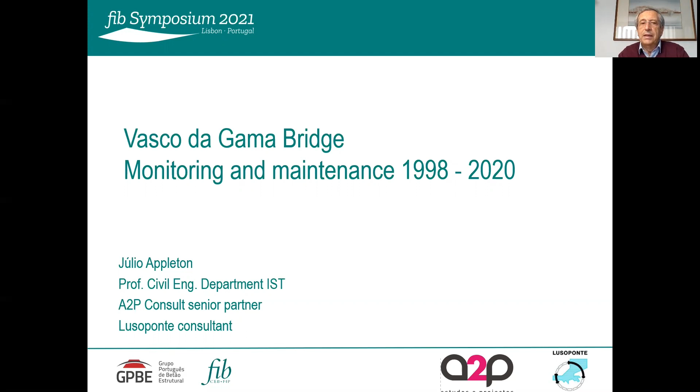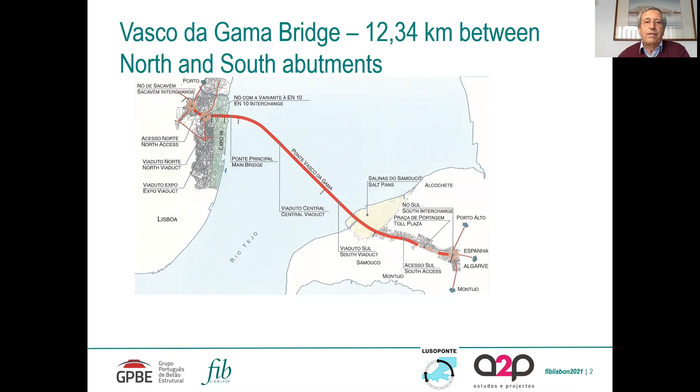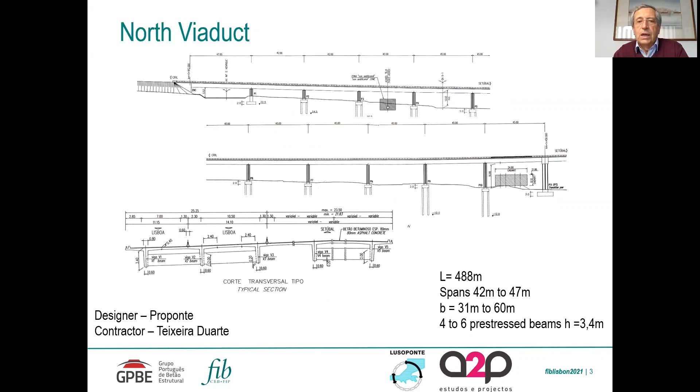Between the abutments, Vasco da Gama Bridge has 12 kilometers and 340 meters, with 5 types of different structures, starting on the right bank with the North Viaduct, 488 meters long, with typical spans of 45 meters. The deck was constructed with traditional scaffolding supported on the ground.

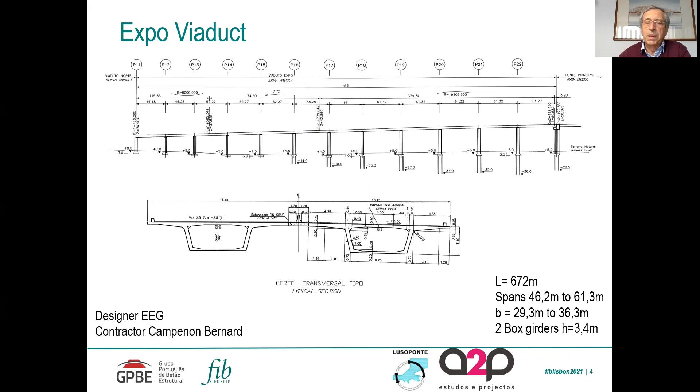Then the Expo Viaduct was constructed, the deck with a cantilever system of construction with precast segments. It has a total length of 672 meters and typical spans of 61 meters.

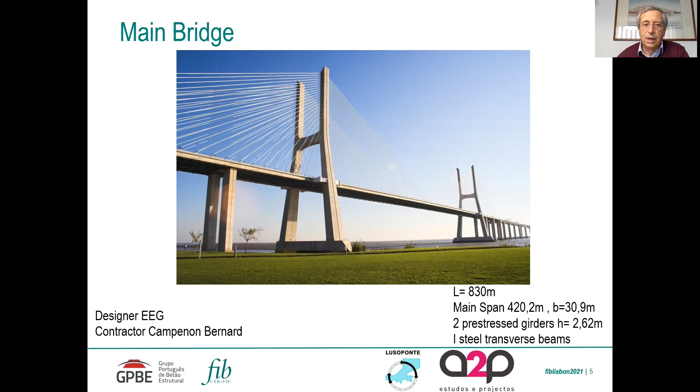Then the main bridge with a total length of 830 meters and the central span with 420 meters. The deck is a full suspension system, meaning there is no vertical support of the deck on the tower.

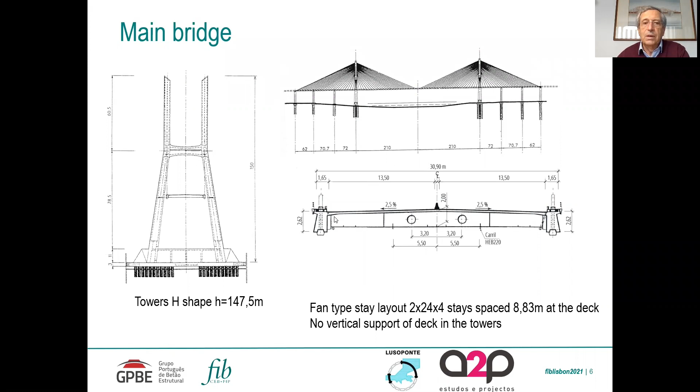The stays are fixed in 2 lateral pre-stressed concrete beams. The beams are connected by steel transverse beams.

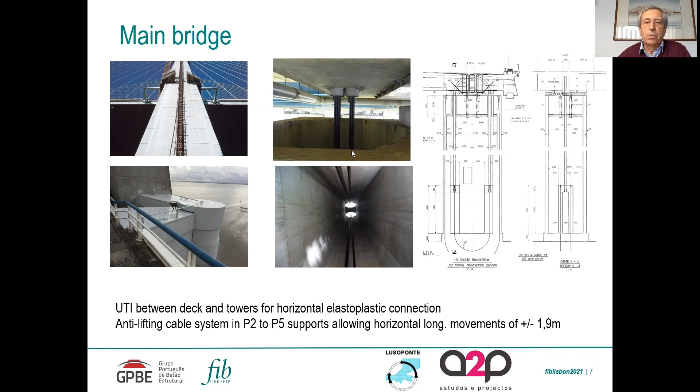That is done with these pre-stressing cables that connect the top of the deck to the bottom of the piers.

Then the central viaduct is the longest structure in the Vasco da Gama Bridge, with 6,530 meters, typical spans of 78 meters, and navigation spans of 130 meters. These navigation spans were also done with the cantilever type of construction with precast segments.

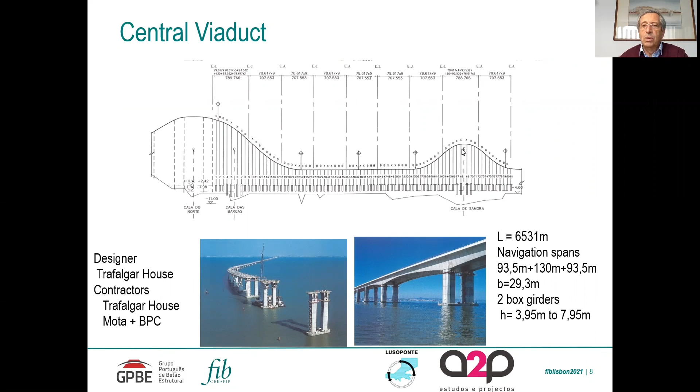The current spans have been done with full precasting and transportation of the total box girder by the Rambiz crane.

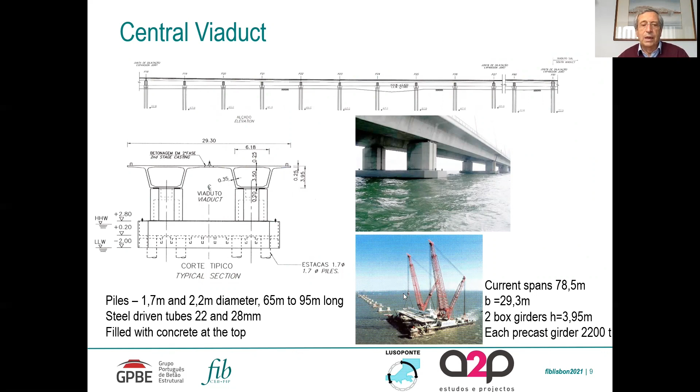Finally, the South Viaduct has 3,800 meters with typical spans of 45 meters. The deck was constructed by a launching girder.

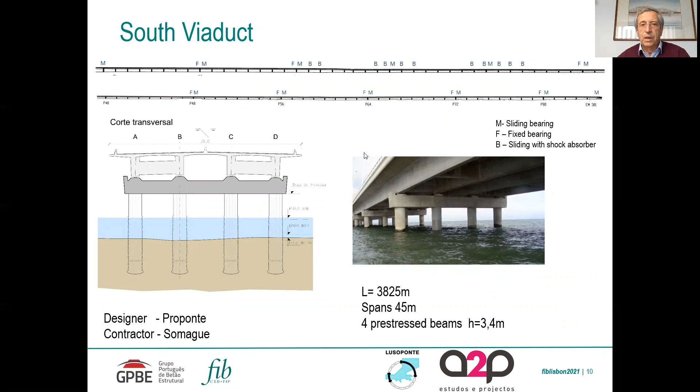This project was a design, construction and operation project. It had a very good initial specification, and I refer here to the service life that was specified at 120 years, and the corresponding cover that was used in the several structures.

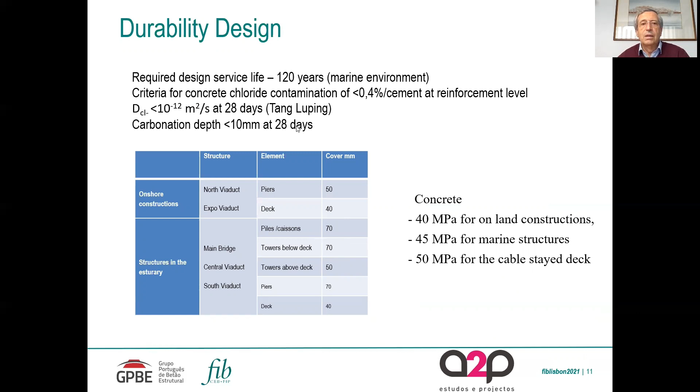For the marine structures, 7 centimeters. The concrete strengths - you have here the minimum values and the concrete quality specified.

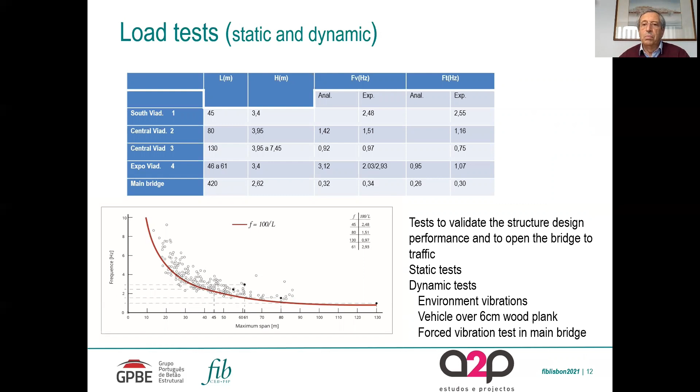Finishing the construction, static and dynamic load tests were performed. In this slide, you can see the vertical frequency of vibration of the various structures. The dynamic tests were done using environment vibration, or using a vehicle over a wood plank, and for the main bridge, a forced vibration test with a 60-ton mass fixed with pre-stressing cables that were then cut.

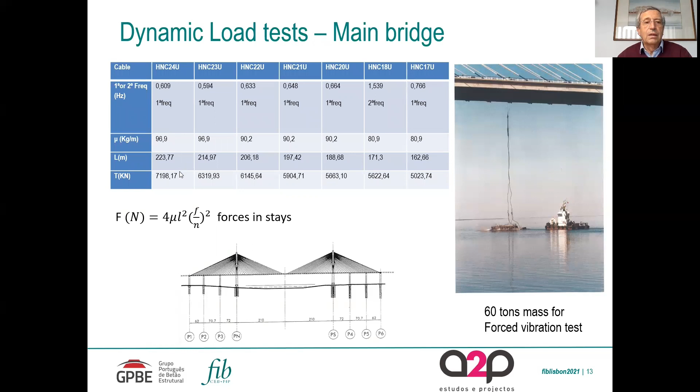You can also see in this slide the measurement of the frequencies in the stays, which enables evaluation of the forces in the stays and comparison with the design values.

Starting in March 98, we had the monitoring plan. In the structure, a lot of sensors were used to measure deformations, rotations, joint movement, temperatures, and also topographic monitoring.

The main objectives of this monitoring plan are to assess the behavior of the structure in service conditions, and if there is an extreme event, to have enough information to assess the eventual damage in the structure.

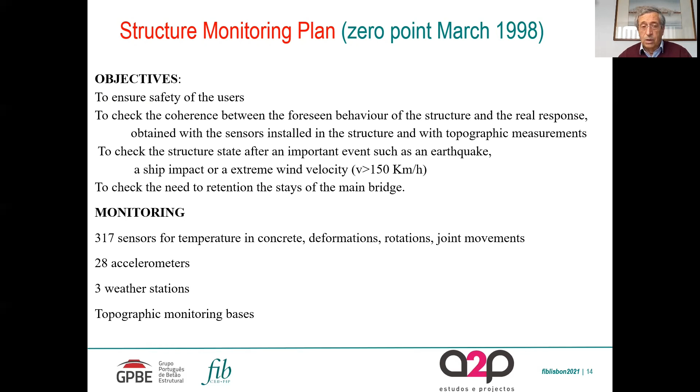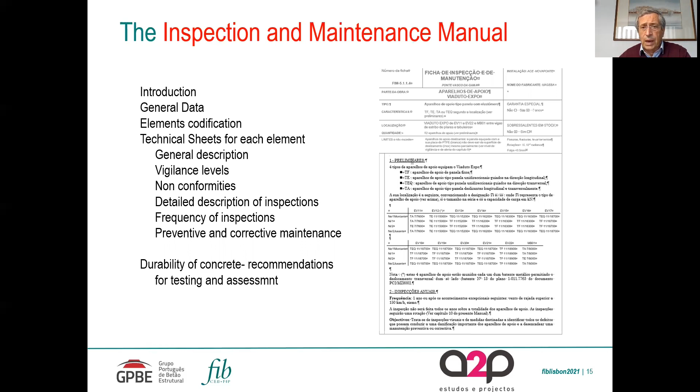A very important document for maintenance works and inspection is this manual, where for all the structures and all the elements, we have a description of the element, what should be inspected, with what regularity, and what can be the envisaged preventive and corrective maintenance. I show here these technical sheets for the bearings of the Expo Viaduct.

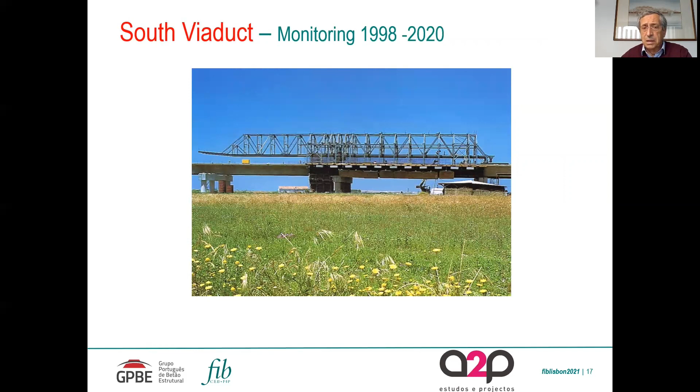Now I selected some monitoring and maintenance works in the 3 structures: the South Viaduct, the Central Viaduct, and the main bridge. You can see here the registration of the sensors inside the concrete to evaluate the temperature variations along the days and along the year.

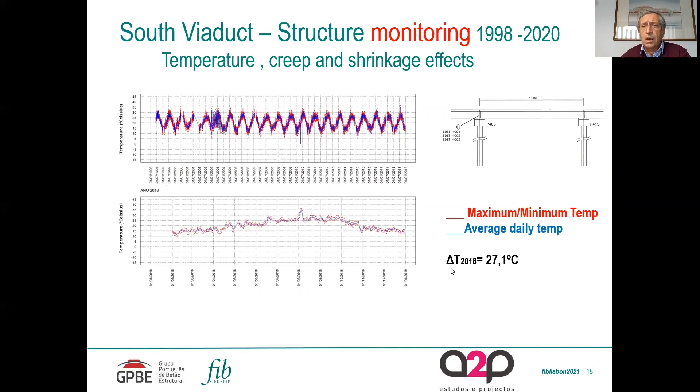Here you have, during 2018, the average daily temperature and the maximum and minimum temperature, an amplitude of 27 degrees maximum in 2018.

The expansion joints are also monitored. For this structure, the distance between the joints is 360 meters. The expansion joint movement is the sum of the variation of the two adjacent structures. In this case, one of the structures has fixed bearings, but the pier can move due to creep, shrinkage, and temperature. On the other side, the bearings are sliding bearings, so the deck can move.

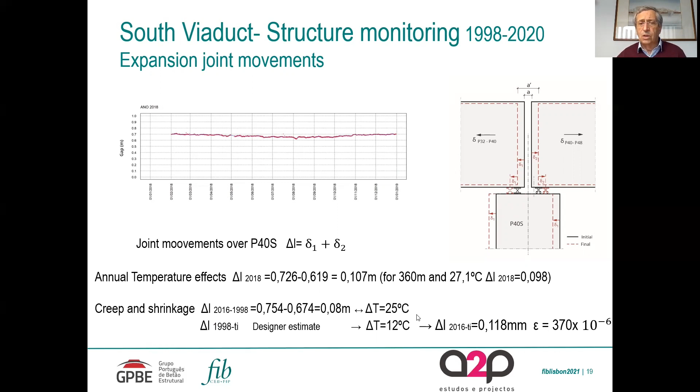We can see that in 2018, there was an amplitude of movement of the joint of 10 centimeters, and we can assess along the years what was the effect of creep and shrinkage. We arrived at 11.8 centimeters, which corresponds to an equivalent temperature variation of 37 degrees.

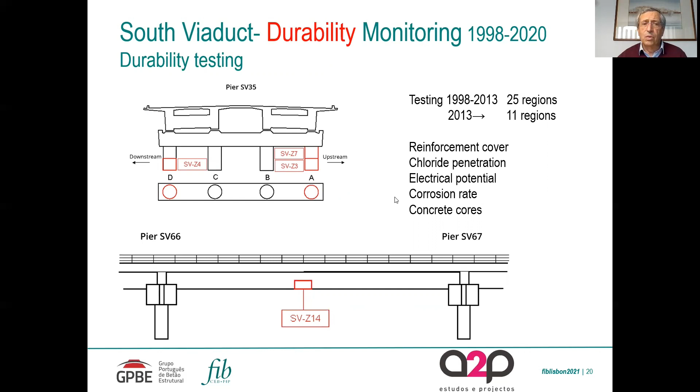To assess durability, we selected in the beginning 25 regions where we measure the cover, assess the chloride penetration, and perform other tests to assess the eventual corrosion of reinforcement, and we extract some cores as well. You see here a slide with the results of the geophysical radar.

All the piers and piles have had their cover determined. Unfortunately, in some cases, we realized that the reinforcement has moved horizontally, and in some areas the cover is not the 7 centimeters that was specified.

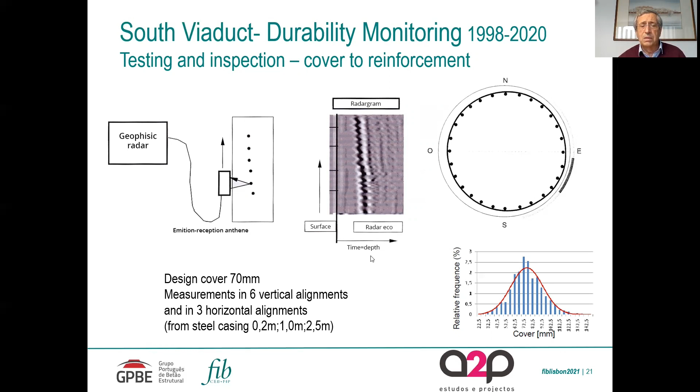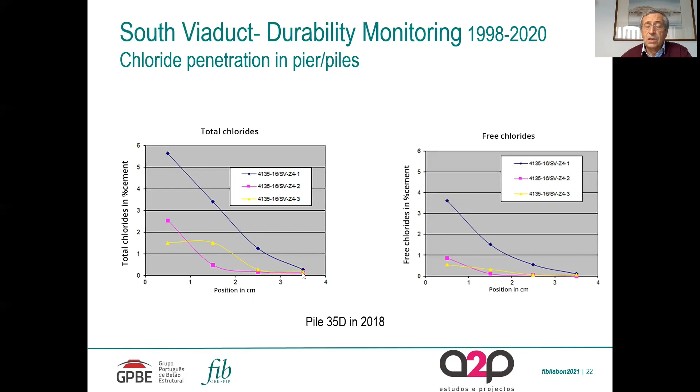So, in what concerns chlorides, when there are no concrete defects, the chlorides have reduced penetration. So after these 22 years, it arrived only to 3 centimeters deep.

With these results, the diffusion coefficient and its variation could be assessed, and a deterministic prediction of the chloride penetration was done by the laboratory LERM. The conclusion is that for the next 20 years, it is not expected to have depassivation of reinforcement due to chloride at 7 centimeters deep.

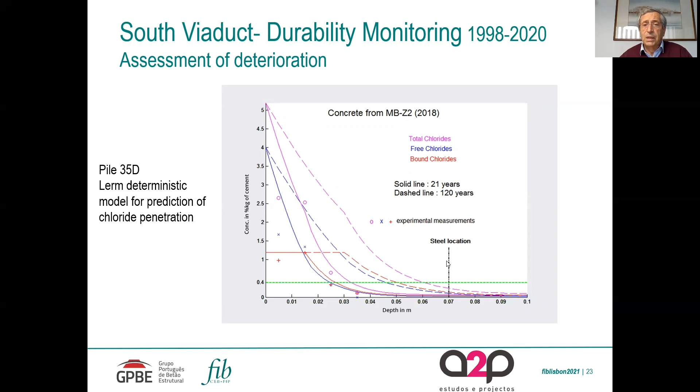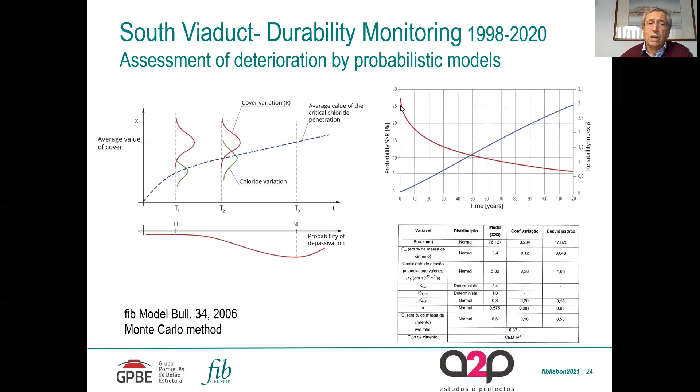But since the cover is not a deterministic and fixed value, as there is large variation, and also the chloride penetration is not a deterministic value, we have performed a probabilistic model using the FIB Bulletin 34 model, and we arrived at the conclusion that for the next 20 years we get a high probability of depassivation in the reinforcement.

This explains why, since 2004, several maintenance, repairing, and preventive maintenance works have been executed in the South Viaduct. The first activity was to introduce, in some alignments, the advanced pile encapsulation system. It consists of a casing, a glass fiber casing, and the injection of an epoxy grout.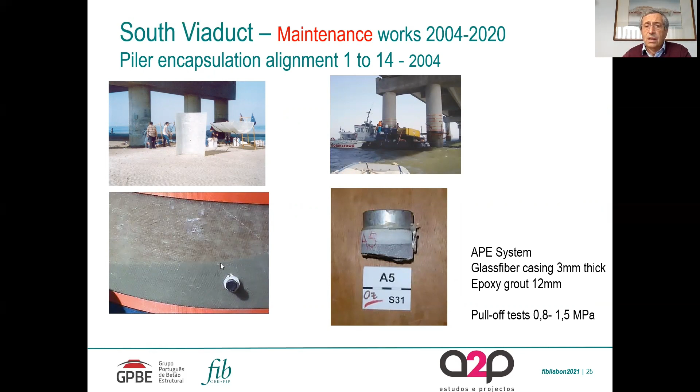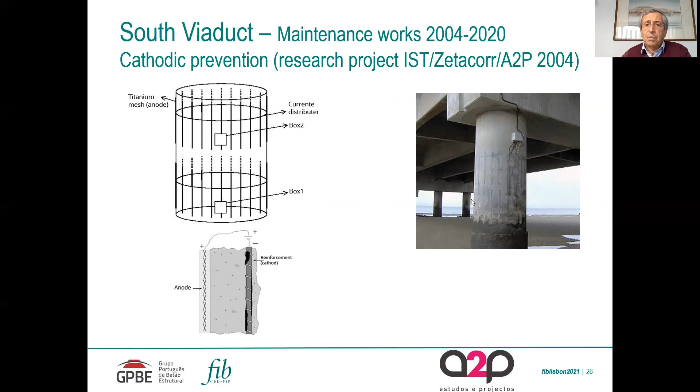And that year, we also had the opportunity to participate in a research project, and we introduced in one pier a preventive cathodic system with titanium anodes.

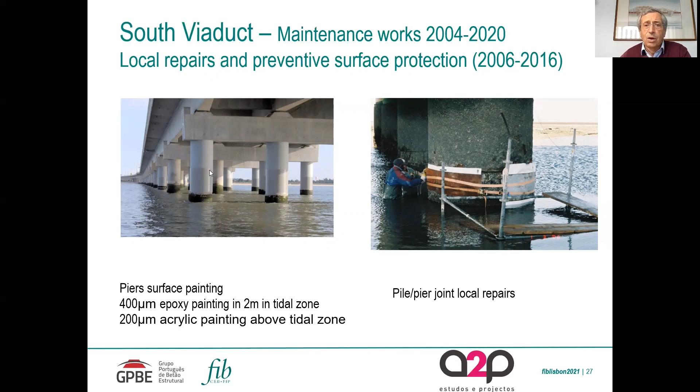Then, in the piers where the cover didn't reach 7 centimeters, we introduced a protective surface painting with epoxy in the tidal zone and acrylic painting on the top of the piers. We have also done some local repairing.

Later on, we verified in the inspections that in the piers and piles that had been executed with a temporary earthfill, at the top of the pile and the start of the pier, there were some concreting defects, as you can see here, that were not corrected during construction.

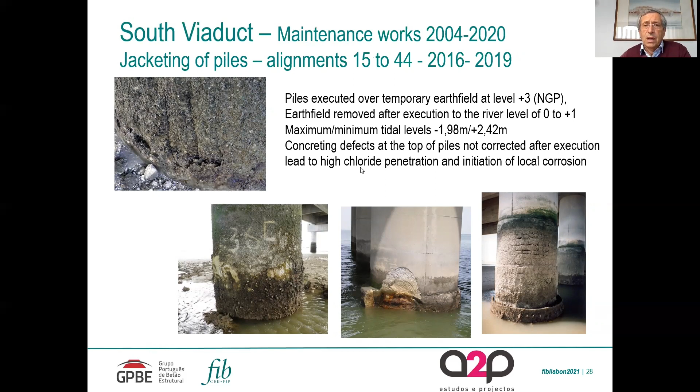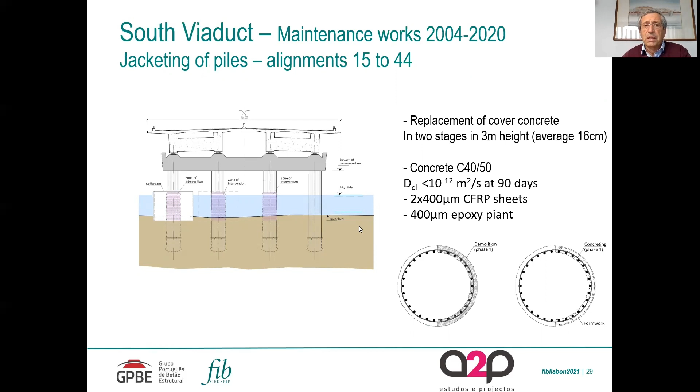And so in 2016, repairing was introduced, replacing the cover concrete and also doing a confinement with carbon fiber afterwards. You see here the schematic of the two phases of this activity.

To do this work properly and with the correct quality, we have to do it under dry conditions.

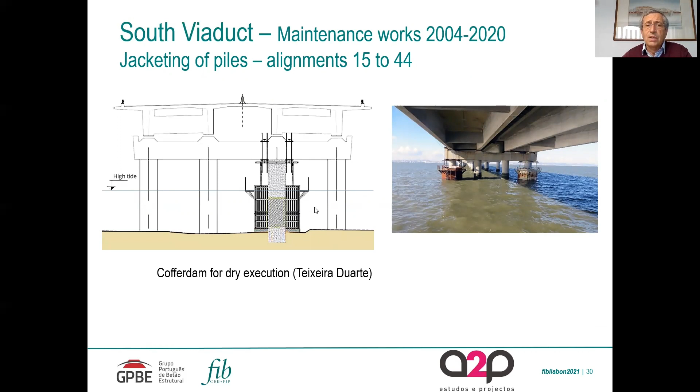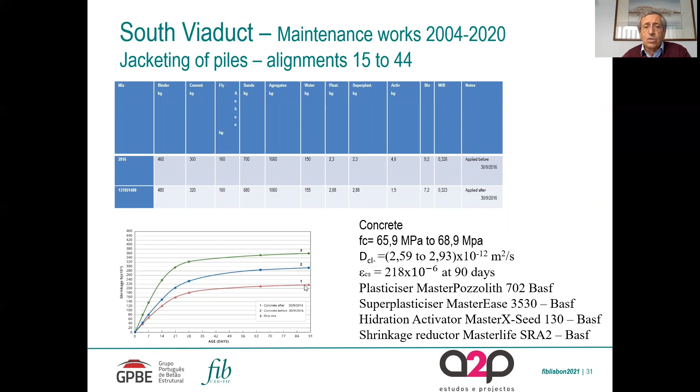So cofferdams were installed in these alignments. Here we present the composition of the micro concrete used in this repairing. Very good concrete, and the shrinkage was controlled to low values using some shrinkage reduction.

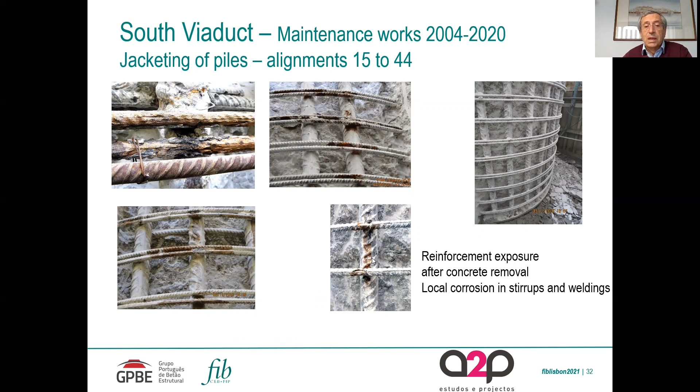When we started doing the repairing, cutting the concrete, in some local areas we could find some corrosion in the stirrups, and also reduced corrosion in the main bars in places where welding was done between the stirrups and these bars.

Here I show the concreting, the transport of concrete to the pier and the repairing, the confinement with the carbon fiber reinforced plastic, and the final epoxy paint in this tidal area.

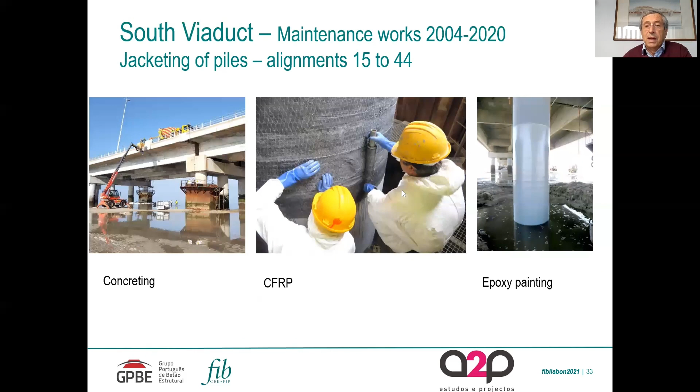In the south viaduct, near the left bank, some piers are located in salt tanks. You see here, after dewatering, the amount of salt that was near the pier.

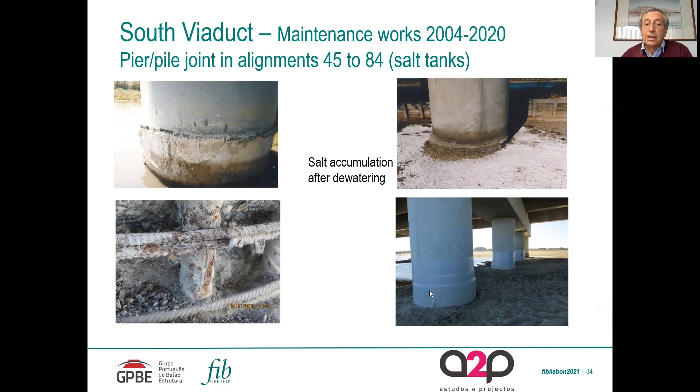We also checked in the inspection that the joints were not always well treated. In fact, when we decided to do the repairing on those joints that presented some anomalies, we found the beginning of the corrosion. So the concrete was removed, as explained before, to a height of 55 centimeters.

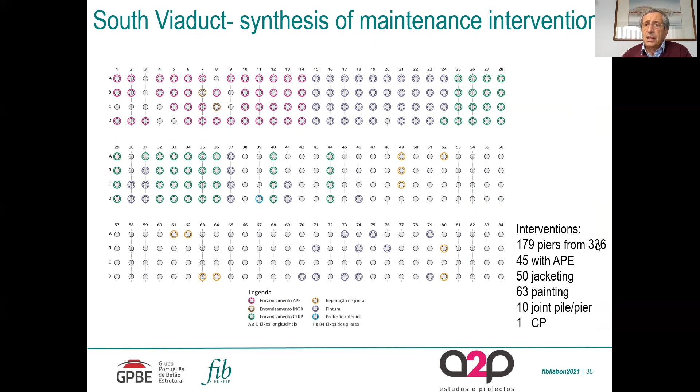So since '98, we had already maintenance, preventive maintenance and repairing in 179 of the 336 piers, so more than 50%.

Now I move to the central viaduct, the longest structure in the Vasco da Gama bridge. Here I show similar registration of the temperature in concrete in the deck.

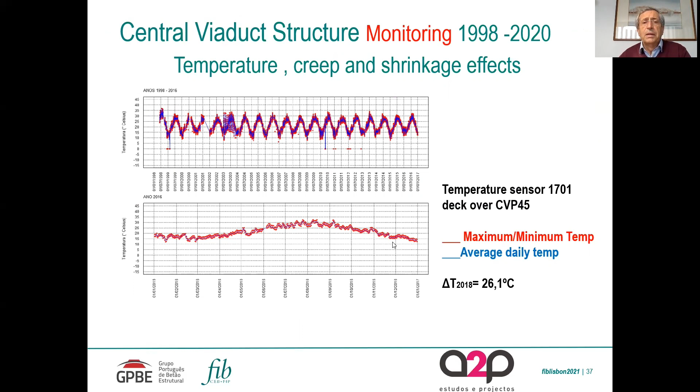Here the expansion joint movements. Here the joints are distanced 700 meters, and we can also evaluate not only the temperature variation along here, but also the creep and shrinkage effect.

Much lower than in South Viaduct, because the precast system used in this structure led to the situation where a great part of these time effects took place before monitoring.

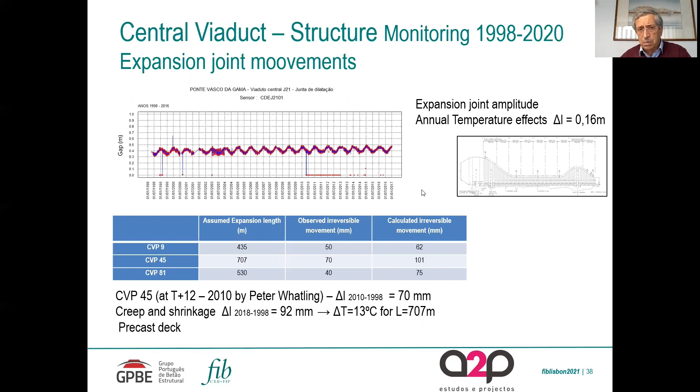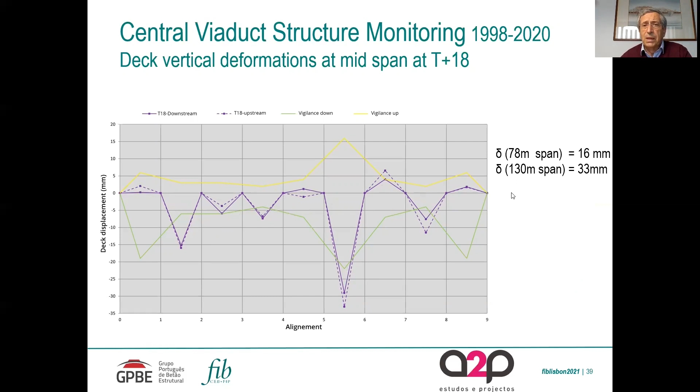In the navigation span of 130 meters, we have 33 millimeter permanent deformation. For durability in this structure, we chose 26 regions where we performed the same tests as explained before for the South Viaduct.

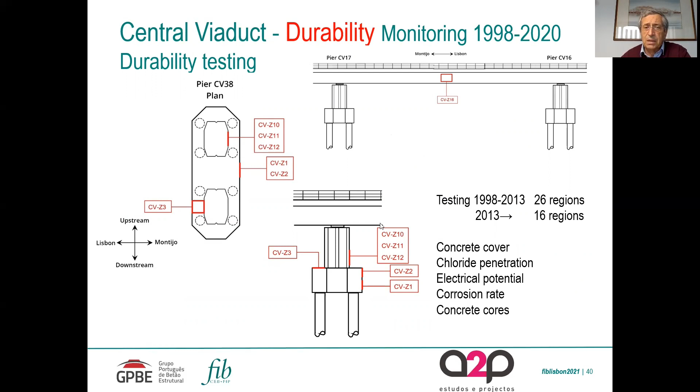In this central viaduct, also the piles in this structure were steel driven piles, and so it was decided to monitor the loss of section of the steel casing.

So after 16 years, we arrived at the conclusion that we have only 1 millimeter loss, with an expectation of 6 to 9 millimeter loss in 120 years. The piles have 22, 28 millimeter thickness.

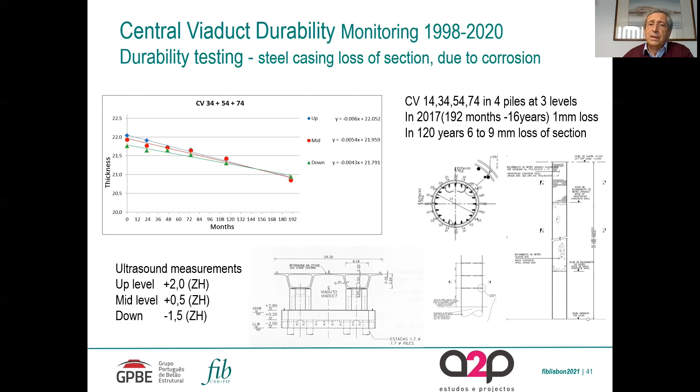It is to be remembered that at the top of the pile, where these measurements are done at 15 meters, there is a reinforced concrete pile. So even if the steel pipe has loss of section, the safety is guaranteed by the concrete pile.

In this central viaduct, the foundations were concreted inside a false work, a concrete precast false work, and we could check in the inspections that there was the joint with a slight opening.

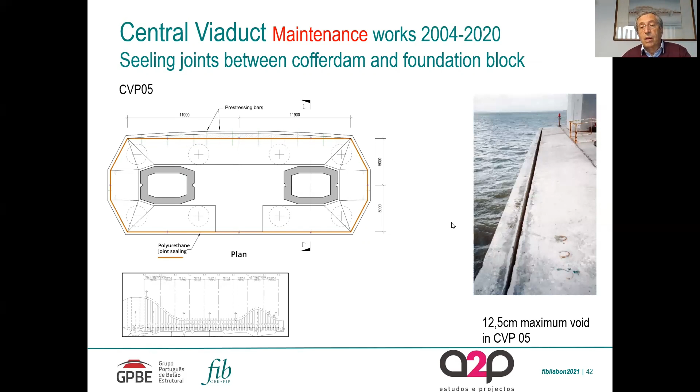Only in one foundation we had a 12 centimeter opening, because in general it is 1 millimeter, and all the joints have been sealed. In this case, for this block, the gap was filled, and pre-stressed bars with inox steel were applied to guarantee the connection between the precast element and the inside block.

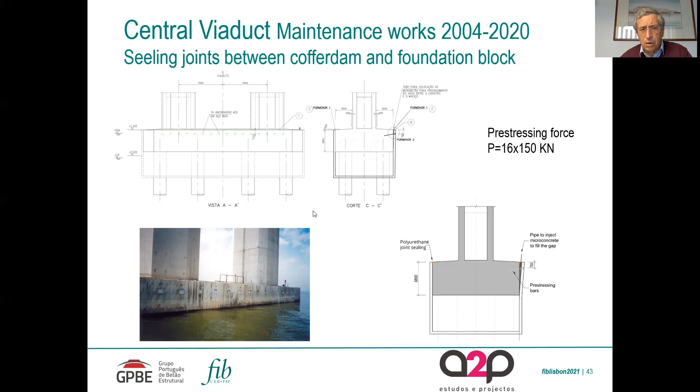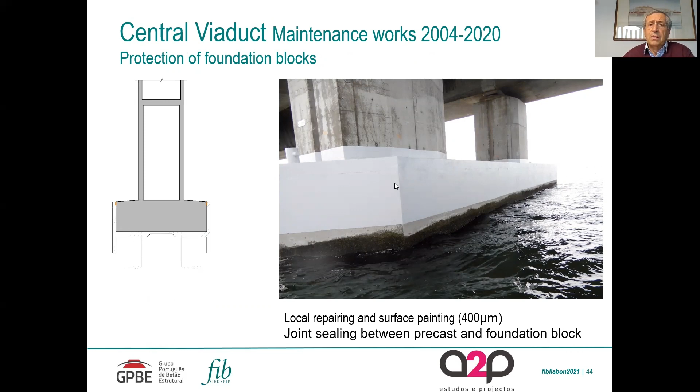Also in these precast elements, although they are not a structure, preventive maintenance has been applied with an epoxy painting and repairing when required.

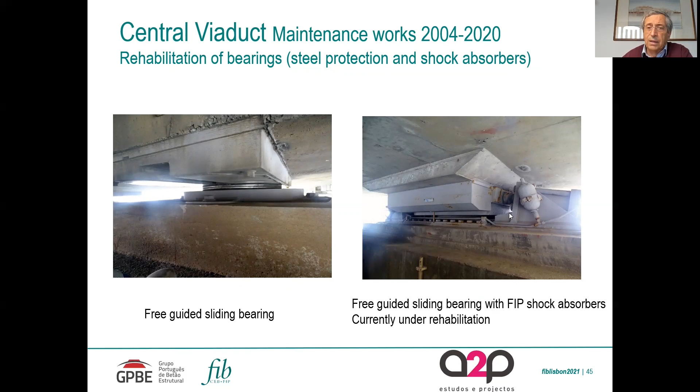Nowadays the bearings are the objective of maintenance of the steel parts, painting the steel parts that present initiation of some rust, and the shock absorbers are repaired and replaced in some cases.

So in this structure, now we have done some type of intervention in 65 of the 84 foundation blocks. The piers and the deck don't show any special problem.

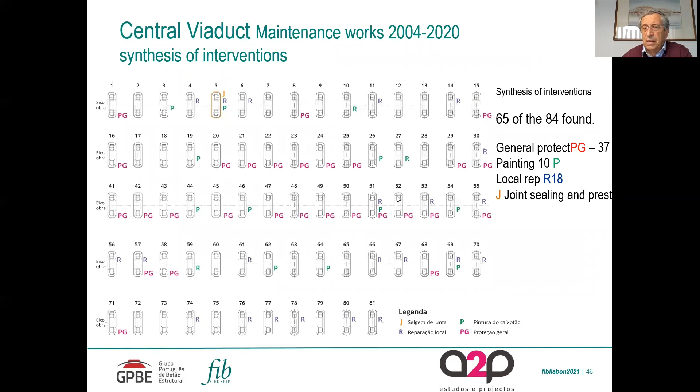So I move now to the main bridge, to the cable stayed bridge, and after 3 years of service, it was planned to do the retensioning of the stays, and that was done.

At that time, we could see that the deck had a downwards deflection of 10 centimeters. Then the retensioning planned by the designer led to an upward deflection of 43 centimeters. From 2001 to 2020, we saw a permanent downwards deflection of only 5 centimeters.

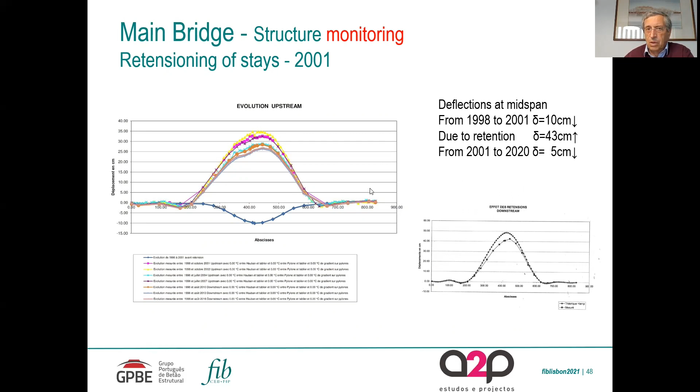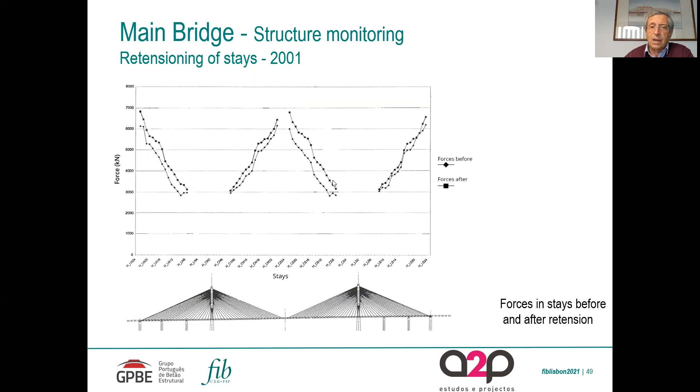So it is not expected to do any more retention in the stays. You can see here the effect of retention in the force in the stays, 500, 600, 700 kilonewtons increase in the force of the stays.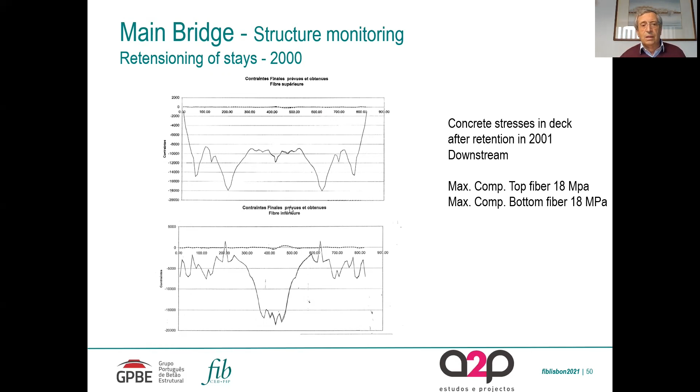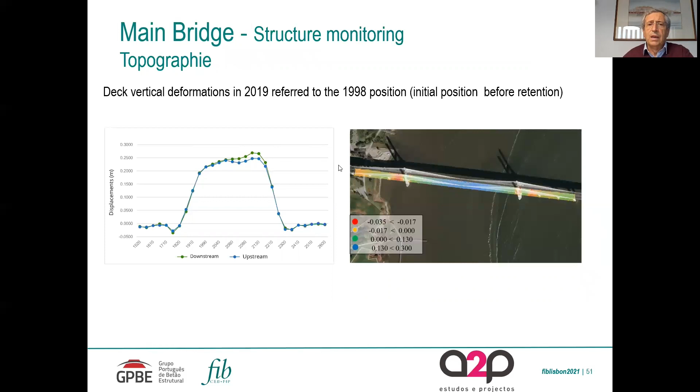In this slide, we see the result of the topographic measurements for the deflections in the deck of the main bridge. You can see that now we have almost 25 centimeter upwards deflection in the central span. On the right, you see the hypsometric representation of these deformations in the deck.

For the longitudinal displacements, we could check a shortening of the deck of 174 millimeters from the start of monitoring.

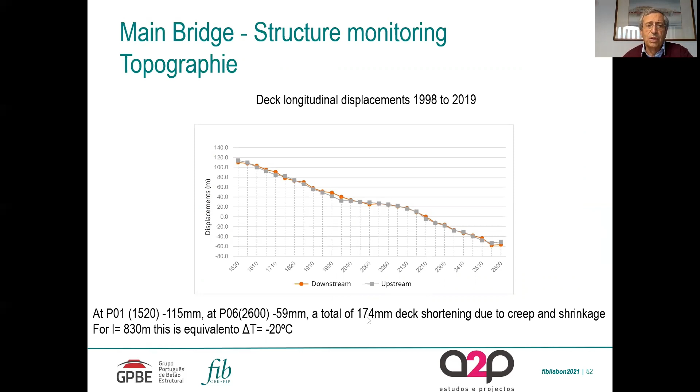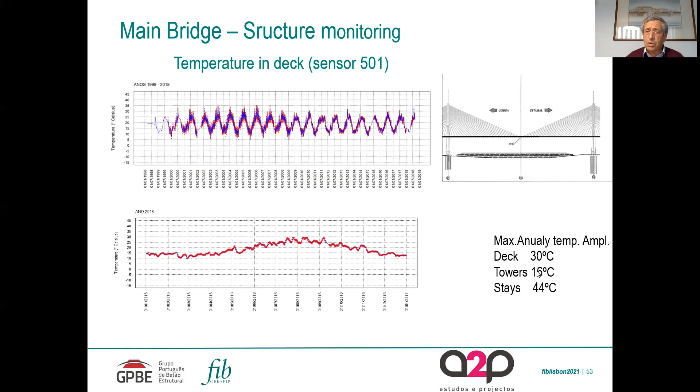Temperature is also monitored by several sensors in the deck, towers, and stays, with quite different amplitudes. In the deck, similar to other structures. In the towers, only 16 degrees, but in the stays, quite a large temperature gradient of 42 degrees in 2017.

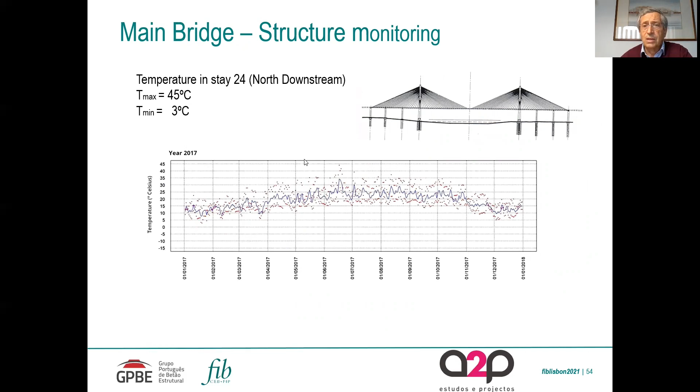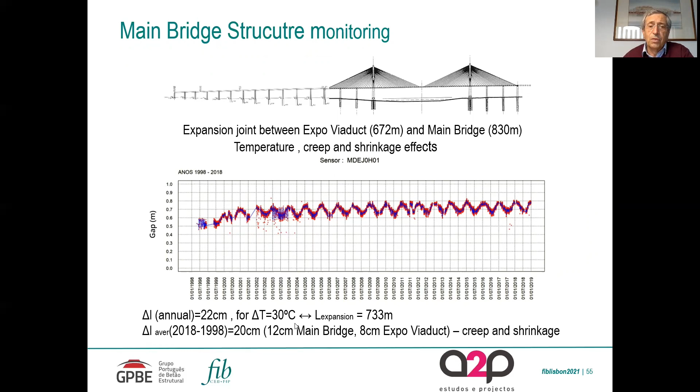The joints are also monitored, in this case the joint between the main bridge and the Expo viaduct. We had a permanent opening of the joint of 20 centimeters after monitoring. 12 centimeters come from the shortening of the main bridge, and 8 centimeters from the Expo viaduct.

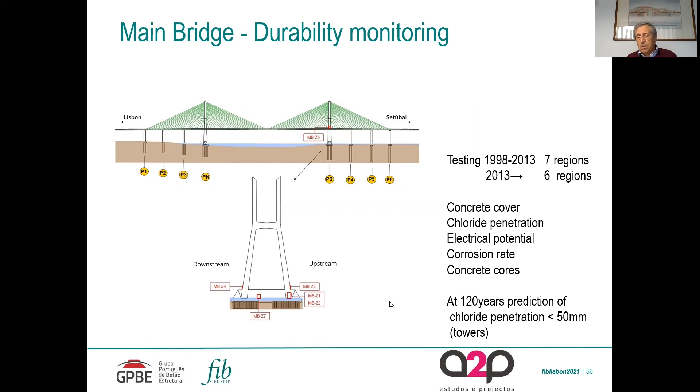For durability, we chose 7 regions. We verified along these years that there are almost no anomalies at all in the main bridge.

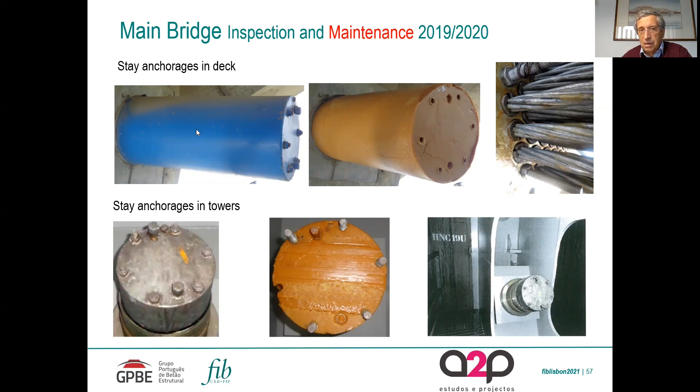The stays have also been inspected in 2019. The anchorages have been opened to check if the grease was still in good position, the grease that protects the cable, the strands of the cables, as you see here. This was done in the anchorage, in the deck, and in the towers.

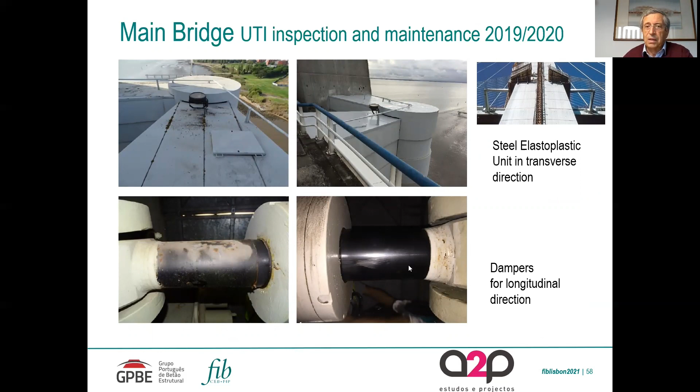In these last years, the bearings and the impact units have been maintained, the steel structure painted, and the dampers and elastoplastic units cleaned and protected. The bearings have also been painted where some initiation of rust could be seen here.

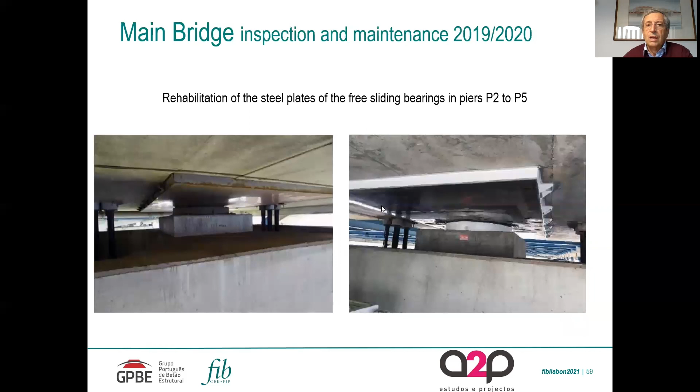So we could conclude that this project was not only a success in design, construction, and globally, but also in what is being done for inspection and maintenance. It has been correct, what shall be done, and we are very proud of this work that is being done on the bridge, and the bridge is here to continue its role in this metropolitan area of Lisbon.

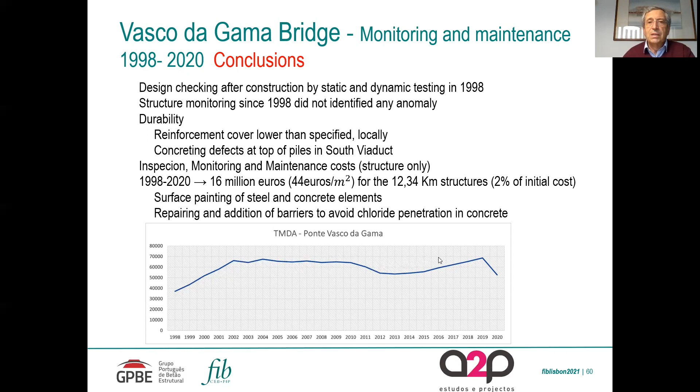The traffic has increased significantly in the first years, then it has been maintained, and in the last years, with the pandemic, it has reduced again. Thank you very much.